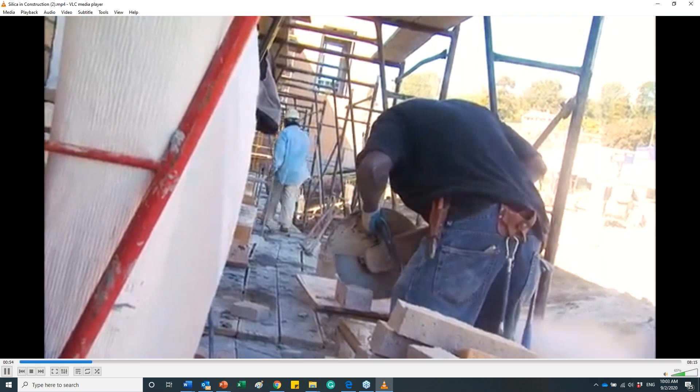The history of lung disease among workers caused by exposure to silica is long and storied. About 2 million construction workers in the U.S. have had occupational exposure to crystalline silica dust. 59,000 of them will develop silicosis and other lung diseases during their lifetime. We've known for decades about how to prevent silica-related diseases. It's not until now that the solutions are mandated by law.

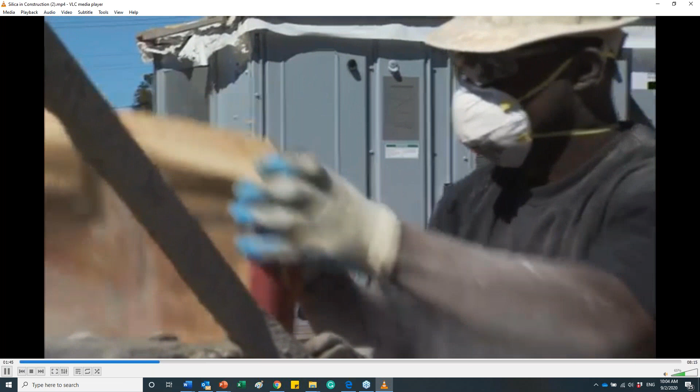Silica is one of the most common minerals on the planet. It's in the sand on our beaches and the quartz of our mountains and land masses. Silica is not dangerous to humans in and of itself. The problems start when we work to manipulate it for our own ends. And that's exactly what happens in construction. When materials that contain silica are disturbed, they generate small particles that can get into your lungs. And once they go in, they don't come out.

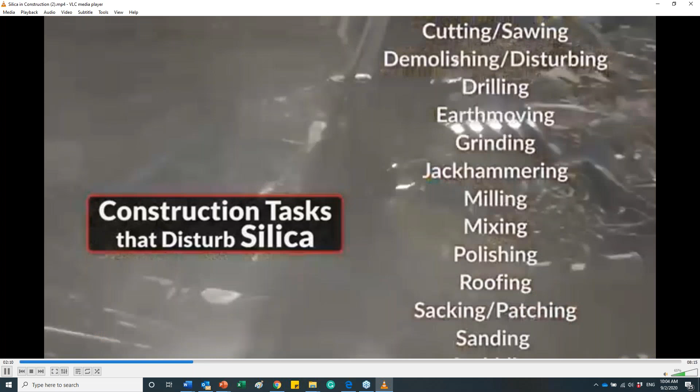On a construction site, we find silica in many materials. Here are some of the tasks that disturb silica and make it dangerous for workers. Bricklayers, cement masons, and roofers routinely work with silica materials. Operating engineers and laborers may work with silica materials when moving earth or doing demolition. If you do occasional cutting or drilling as an electrician, sheet metal worker, plumber, or pipe fitter, you may be impacted. And if your work puts you in a dusty area, you need to be aware of your surroundings.

Silica is not a recently created hazard. It was first discovered by Hippocrates in about 400 BC. 4 centuries later, Pliny the Elder described miners who used forms of respiratory protection. In 1700, Dr. Bernardino Ramazzini identified evidence of silicosis in stonecutters.

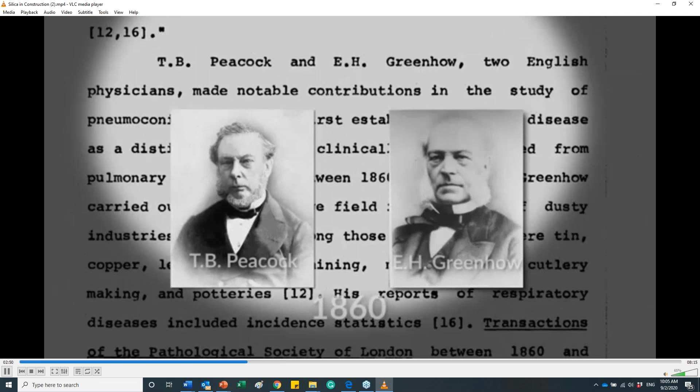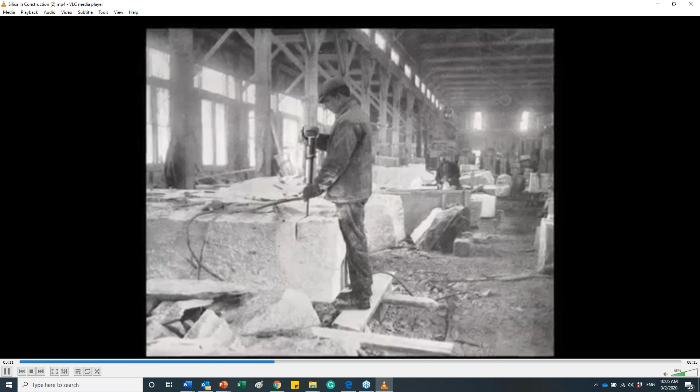In 1860, two English physicians, Peacock and Greenhow, conducted an autopsy of a mason and found a hard, gritty material in his lungs, which they called sand. In the US, in 1917, Dr. Alice Hamilton made the connection between the dust that Vermont granite cutters were inhaling and the resulting fatal illnesses. By the 1930s, those workers had successfully bargained for the installation of ventilation equipment in their worksheds.

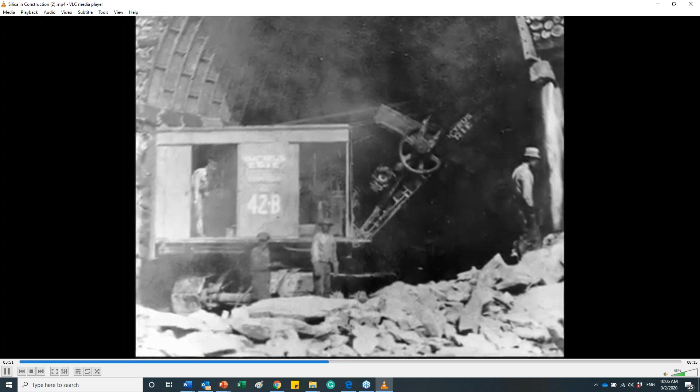In 1931, the nation's worst industrial disaster took place during the building of a hydroelectric project in West Virginia. 1,500 mostly African-American workers who came north to find work ended up dying in the Hawk's Nest tunnel disaster. They were ordered to drill through that mountain, made entirely of silica, and had no meaningful protection at all. It turned out the employer knew how dangerous it was, because when the engineers and company representatives went there, they wore masks. So they knew it, but they didn't care about their workers.

476 workers died almost immediately. Many were buried in trenches in a nearby field with just corn stalks for markers. Another 1,500 contracted the disease within two years.

I lost 3 sons from working in the tunnel of silicosis. One is 18, 23, and 21. And I have silicosis myself, and it's impossible for me to get a job anywhere. My husband, Cecil Jones, died of working in the Hawk's Nest tunnel, contracted silicosis. And each and every day that I worked in that tunnel, I had to carry out 10 to 14 men overcome by the dust.

The Hawk's Nest tragedy directly connected exposure to silica with silicosis and spurred public outcry for worker protection and workers' compensation. In 1938, then Secretary of Labor Frances Perkins commissioned a study on how to work more safely with silica. After a year of work, the National Silicosis Conference Committee made its report of findings and recommendations, showing how silicosis occurs, where it occurs, and what the disease is, with recommendations for its practical control. Above all, the report emphasizes that if these control measures are conscientiously adopted and applied, silicosis can be prevented.

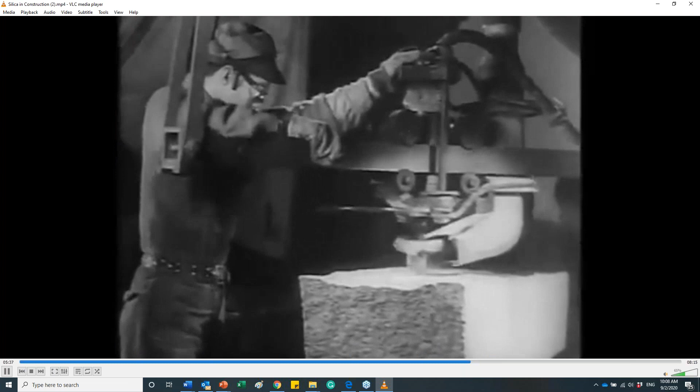The 1938 recommendations were to work wet and use vacuums to minimize the dust. Unfortunately, these were merely suggestions and didn't have the teeth of enforcement. Many employers did follow the recommendations until technology advanced, making it possible to work dry. The new methods saved time and money, but caused a renewed increase in silicosis and other lung diseases.

In the early days of my career, I never saw a masonry saw that was not water cooled. We couldn't - the blades would fall apart if they weren't wet. Since the wet-dry blade came into effect, hey, the water stops going, we keep right on cutting.

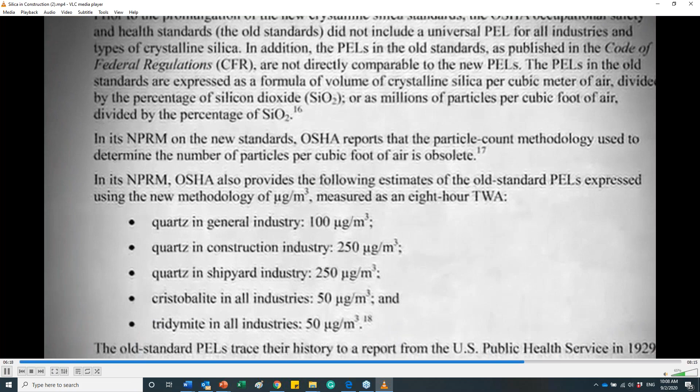The Occupational Safety and Health Administration wasn't established until 1971. That year, OSHA mandated a limit for the amount of silica a worker could be exposed to, but it didn't go far enough. We already knew that the standard that went into place back in the early 70s was out of date the day it went into place.

Fast forward to 2016. After decades of trying, OSHA finally released a federal standard lowering the exposure limit by more than half and creating a series of recommendations for how to work safely with silica. The Labor Department is announcing a final silica rule that updates the standards, saving more than 600 lives per year and protecting the health of thousands of others.

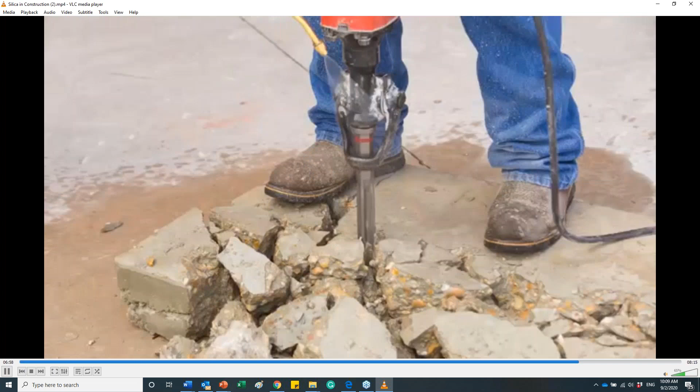The recommendations are essentially the same ones they made in 1938: work wet and use vacuums to eliminate or reduce dust at its source. It took nearly 80 years to get federal protection from silica, but now that it's in place, we need to use it. Workers need to learn more about the hazard and use the recommended controls. Always be aware of your surroundings and the work being done by other crafts, and take care not to bring the dust home on your clothes or person. Contractors must designate a competent person to control and monitor for silica on the job. Make sure your workers are using vacuums, water, substitutes, ventilation, or different work practices, and provide respiratory protection when needed.

Too many workers have died from silica for too many years. We can work safely with silica. Let's do it.

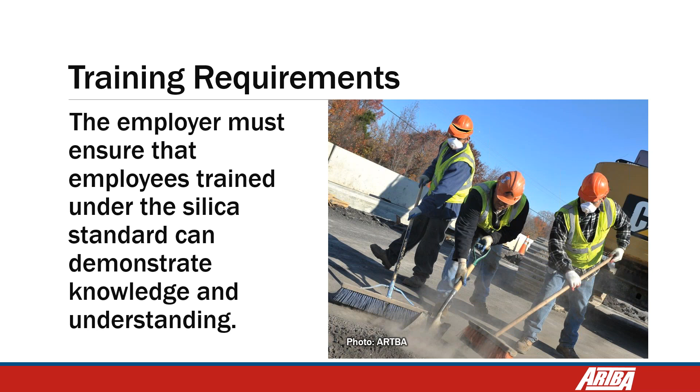Training requirements: the employer must ensure that employees trained under the silica standard can demonstrate knowledge and understanding. And how are they going to demonstrate that knowledge and understanding is another question. How can we do it?

Employees must be trained on the health hazards associated with respirable crystalline silica exposure. Overexposure can place the employee at risk for cancer and all the other illnesses that we were talking about. But we need to show that they were trained.

There is no requirement for where to provide the training or who should provide the training, but some training requirements state employees must be trained on the specific workplace tasks that could expose them to respirable crystalline silica. Look, 18 examples are listed on Table 1, such as milling, asphalt, and drilling concrete.

For these activities, if you go to the OSHA webpage, you are going to find the fact sheets. Let me show you the fact sheets. I have all the fact sheets here. I downloaded all the fact sheets, and each fact sheet covers one of these activities.

Let's open one randomly. Opening this. This is how it looks, one of these fact sheets.

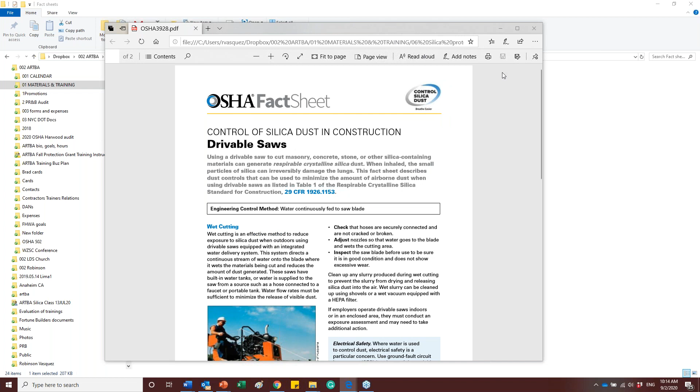So you can find fact sheets for almost every activity you do in your work zone, and you can use these fact sheets to train your workers, because OSHA was not specific about what materials you need to use. But it's interesting that they publish all these fact sheets, and you can use them to train your workers.

So, once a day, in a toolbox talk before doing some activities, you can start printing these fact sheets and start the discussion with your workers. But it's important to at least have the materials that you're using.

For example, you can print all these fact sheets - these are my materials - and you can have a list of the workers receiving the training. Ask them to sign a list regularly every time you train them, because what OSHA requires is to provide training, but it is not requiring who is going to provide the training, where the training is going to be provided, and all these things.

Some training requirements: employers must train employees on workplace specific engineering controls. In these fact sheets you have the engineering controls, work practice controls or administrative controls - you have all the controls there. Also respiratory protection, you have it there too in these fact sheets.

How do they need to use it, or implement all the control methods? How are you going to clean, do the maintenance? What methods are you going to use to remove the dust, to prevent the dust from becoming airborne after you finish the work and have to clean? So all these things are included in each fact sheet has this information.

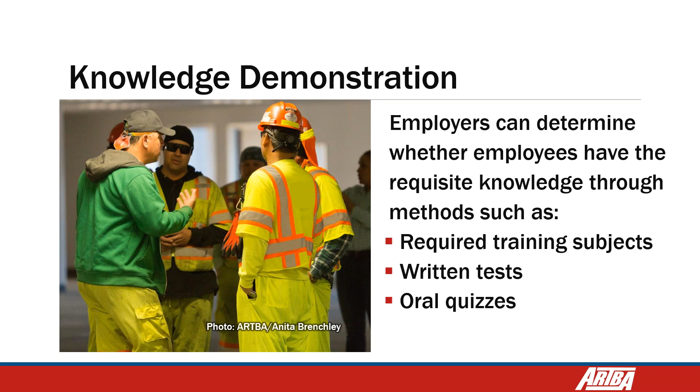Knowledge demonstration: employers can determine whether employees have the requisite knowledge through methods such as required training subjects, written tests, oral quizzes. If you do this, it could be good to keep a record of the workers' answers, because if there is an inspection, it's possible they are going to say, show me that you provided training to your workers, and it could be a good way to show that the workers demonstrate knowledge.

Also, OSHA is not specific about how to do it. When is training required? Employees must be trained at the time they are assigned to a position involving exposure to respirable crystalline silica. So it's important to do it before you start working, basically, to be most effective.

Health hazards, we talked about all the health hazards yesterday. So it's important for your workers to know about it, because they need to be aware of the risk and protect themselves. And also you can train them how to do all these things, basically how to get information, how important it is for them to be safe.

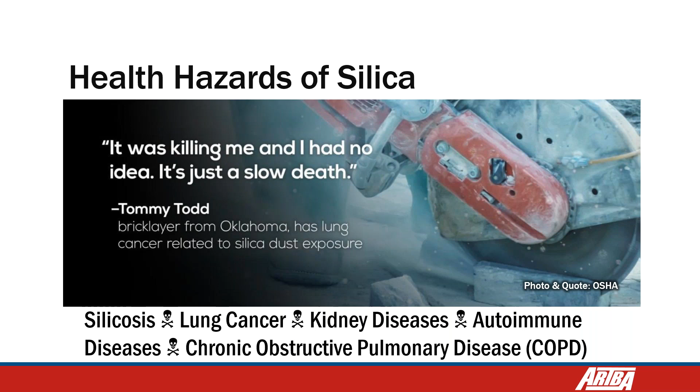They have the power of information in their pockets now. Basically, when I am doing my face-to-face training, I ask the students, hey, let's Google a couple of things: silica protection, OSHA silica standard, OSHA silica table 1, and they can browse it on their cell phones, and they are going to get all this information, and also the fact sheets.

I have another video here. Let me share it with you.

This video provides a brief overview and general information on respiratory hazards in construction and respiratory protection program requirements. The Federal Occupational Safety and Health Administration, also called OSHA, and state OSHA agencies require employers to have respiratory protection programs if their workers are required to wear respirators on the job. This video does not cover all of the things that your employer must do under federal OSHA or state OSHA respiratory protection standards. This video can be a part of the OSHA required respiratory protection training, which includes many topics.

Like how to put on and take off a respirator, and how to use, clean, and maintain your respirator. Your employer must also provide you with worksite specific training. While this video discusses some of your employer's responsibilities under OSHA's respiratory protection standard, it is important to remember that the purpose of a respirator is to protect your health and safety.

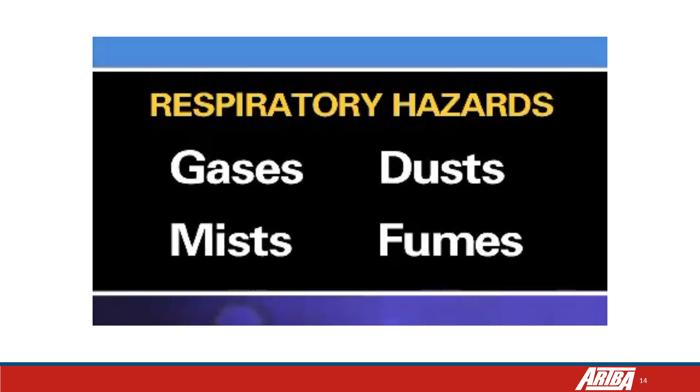Gases, dusts, mists, and fumes may be present at construction work sites. Some of these can make you sick or kill you if you breathe them in. These gases, dusts, mists, and fumes are referred to as respiratory hazards. Some respiratory hazards act quickly, like carbon monoxide, which can make you unconscious or kill you in minutes. Other respiratory hazards can take years to make you sick, like asbestos, which can cause lung cancer decades after you breathe it in.

More examples of respiratory hazards in construction include lead dust and fumes from grinding, welding, cutting, or brazing surfaces coated with lead-based paint. Silica dust from cutting concrete or sandblasting. Solvent vapors from adhesives, paints, strippers, cleaning solvents, and spray coatings. And isocyanate vapors from spray foam insulation and certain spray paints or coatings.

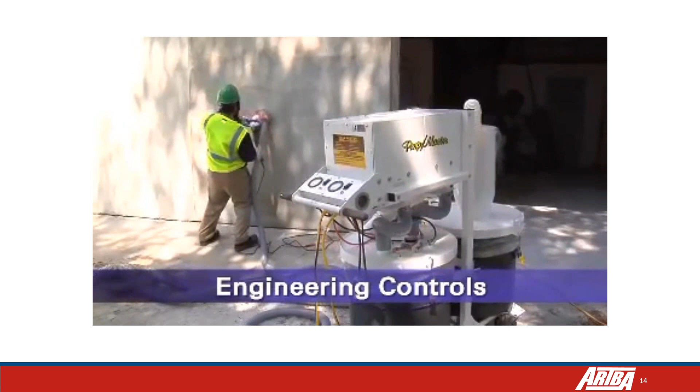When there are respiratory hazards at your job site, your employer must use several methods to reduce your exposure to them, including engineering controls, such as local exhaust ventilation, work practice controls, such as using wet cutting techniques, and administrative controls, such as minimizing the number of workers exposed to the hazard. When you and your coworkers cannot be adequately protected from respiratory hazards through use of these methods, then your employer must provide you with an appropriate respirator to protect your health.

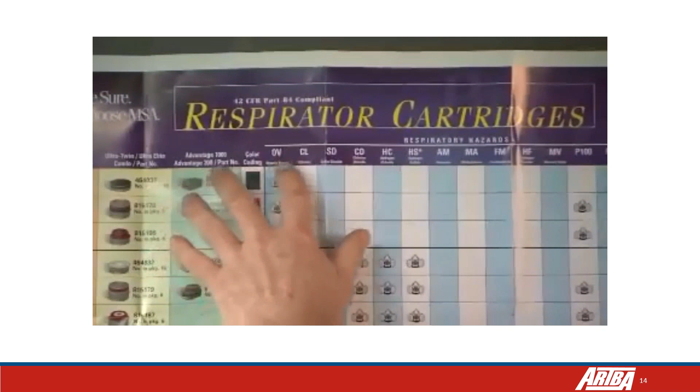Respiratory protection must be selected based on the hazard you will be exposed to on the job. Not every respirator will protect you against every hazard, so it's important for your employer to select the right one.

For example, filtering face piece respirators may protect you against particulate hazards such as dusts. However, a filtering face piece respirator will not protect you against gas and vapor hazards like solvent vapors. If you are exposed to gases and vapors, you will need a different type of respirator.

You could use an air purifying respirator with chemical cartridges, or an atmosphere supplying respirator, such as an airline respirator or self-contained breathing apparatus. Atmosphere supplying respirators are the only respirators that will protect you against hazardous atmospheres, such as carbon monoxide and lack of oxygen. Selecting an appropriate respirator is your employer's responsibility.

When respirators must be used on your job site, your employer must have a respiratory protection program. This program must meet the requirements of either the federal OSHA or your state OSHA respiratory protection standard.

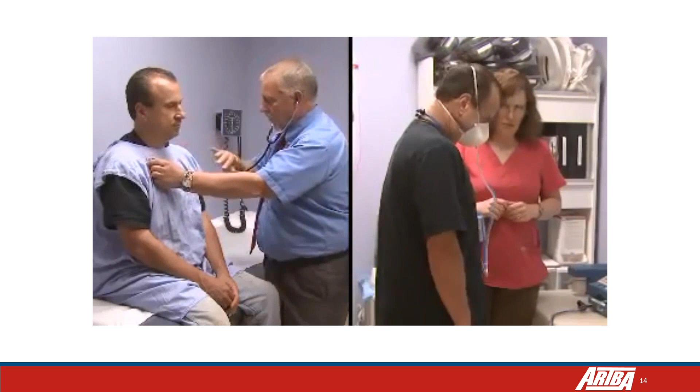The standard requires your employer to do the following: develop and implement a written respiratory protection program, evaluate the respiratory hazards in the workplace, select and provide appropriate respirators, provide worker medical evaluations and respirator fit testing, provide for the maintenance, storage, and cleaning of respirators.

Provide worker training about respiratory hazards and proper respirator use, evaluate workers' use of respirators and correct any problems, and provide you with access to specific records and documents, such as a written copy of your employer's respiratory protection program. Some of these requirements, such as training and fit testing, can be provided by an outside party, including

a union, an apprenticeship program, a contractors association, or a past employer, provided they were conducted within the last 12 months. However, it is still your current employer's responsibility to ensure that all of the requirements of the standard have been met.

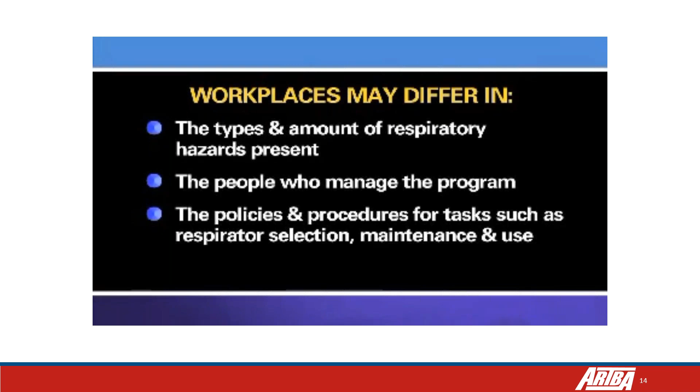Because each workplace is different, it is very important that your employer's respiratory protection program address the conditions found in your specific workplace. For example, workplaces may differ in the following ways: the types and amount of respiratory hazards present, the people who manage the program, the policies and procedures for tasks such as respirator selection, maintenance, and use, and other methods for controlling exposure, such as using wet cutting techniques to reduce airborne dusts.

Since construction work settings change over time, the written program must be updated as necessary to account for those changes in workplace conditions that affect respirator use.

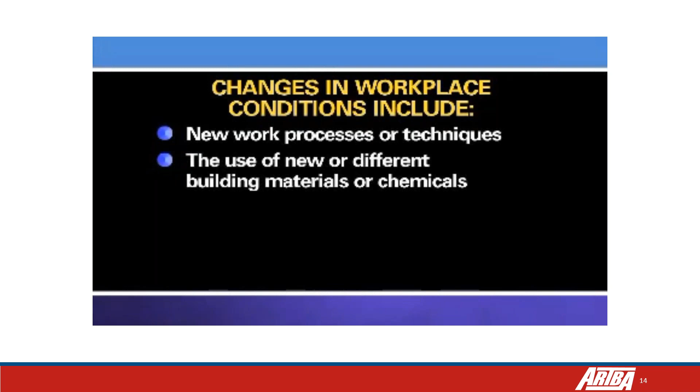For example, changes in workplace conditions could include new work processes or techniques, such as introducing sandblasting into an area, the use of new or different building materials or chemicals, changes in the amount of a respiratory hazard in the workplace, or changes in the types of respirators being used.

Notify your supervisor if something changes in your workplace that conflicts with or may not be covered by your respirator training or established workplace policies or procedures.

Your employer's respiratory protection program must be managed by a qualified, trained program administrator. This person must monitor the program and make sure that you and your coworkers are adequately protected. The program administrator will know a lot about your workplace respiratory protection program and should be able to answer any questions you may have about respirator use.

The program administrator must know about the requirements of the OSHA respiratory protection standard and must periodically evaluate the program and make any necessary changes.

This video has provided you with a brief overview of respiratory hazards in construction and respiratory protection program requirements. There are many other things that you must know and do before you can safely use a respirator in a hazardous work environment. While this video may be a part of your respiratory protection training, your employer must also provide you with additional training on respirators, including worksite-specific training.

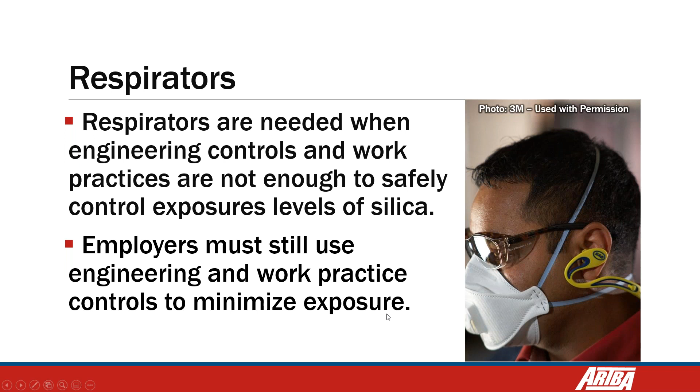Again, it's important to provide training to employees on how to properly use respirators. For example, in this case we can see this guy has a beard, a mustache. Sometimes all this hair is not going to allow the respirator or mask to touch his face completely, and there is going to be some infiltration of contaminated air. So we need to shave the face to use a respirator, for example.

When a respirator is required during table 1 tasks that require respirator use, you can see your table 1. You are going to realize that in some cases, if we are following table 1, we don't need to use any mask or respirator. In other cases, we are required to use masks or respirators after 4 hours of working. In other cases, we need to use a respirator at all times. It depends on the circumstances, on what kind of activity you are doing.

Basically, we need to use it according to table 1 when the exposure exceeds or is expected to exceed the permissible level, which is 50 micrograms per cubic meter in an 8-hour exposure. So, using table 1, whenever you need to use a mask, it means that you are above the permissible exposure level.

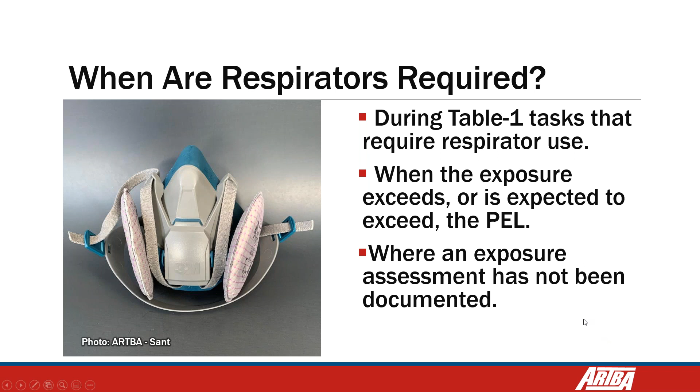If an employee is required to wear a respirator at any time during a work shift, this counts as 1 day toward the 30-day requirement. Look, there is a requirement: when your workers are working with respirators during these 30 days, there is a requirement to send your worker to the doctor to verify that everything is okay with his or her lungs.

This is interesting because anytime, according to table 1, your worker needs to use a respirator, it counts as 1 day. So it's important to think about maybe rotating our workers to prevent them from working more than 4 hours in some cases, so they don't need to use a mask.

A sort of rotation method, just to prevent them from accumulating these 30 days of using a mask. That is going to trigger the need to take your worker to the doctor, just in case.

Then what respirators can be used for silica? All NIOSH-tested and certified particulate or supplied-air respirators may be used for silica protection, only those approved by NIOSH, okay? And when you go to Table 1 again, the law is asking us to use masks or respirators with an APF of 10 in many cases. There is only one case in which an APF of 25 is required.

We understand that N95s are not available in the market because of this situation, but there are some alternatives and you need to explore this document. Let me show you. When you visit your attached documents, you can find this document there. So take a look at this information to help you fulfill the law and protect your workers in these difficult circumstances. We have here some sources of additional information. So let's continue with the next module.

Okay. Now we are going to talk a little more about Table 1 and the alternatives we have to fulfill the law. We have two choices. Either we follow Table 1, with the 18 different tasks in which we can produce respirable crystalline silica dust, and the law says if you follow Table 1 and all the methods to prevent airborne crystalline silica, you are going to fulfill the law. So follow Table 1 and your OSHA inspector is going to be happy. That's one alternative, and we're going to talk more about it.

The other choice: maybe you don't want to follow Table 1 because the activity you are doing is not included in its 18 activities. So you have the alternative exposure control methods: the performance monitoring option and the scheduled monitoring option. The performance monitoring option requires you to create a sort of average of the activities your workers are doing and protect them accordingly. The scheduled monitoring option considers what they are doing according to the process and construction activity over time, and takes evaluations according to this process. Let's explore these alternatives a little more.

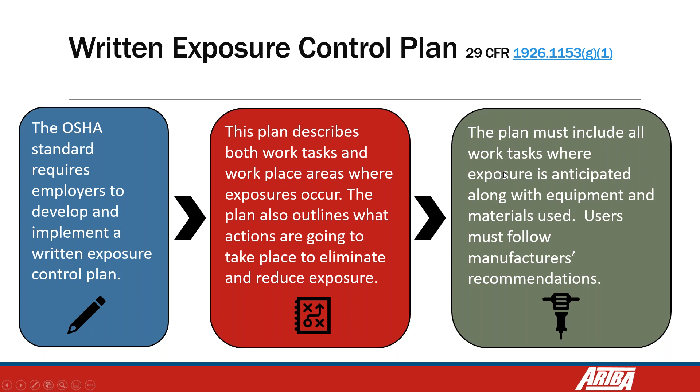For example, there are things that the exposure control plan must include in any circumstances. Maybe you're following Table 1, or maybe you are not, but you have to follow this. Include these topics in your plan. Okay. First, a description of the tasks in the workplace that involve exposure to respirable crystalline silica. You have to describe what task you are going to do.

Then a description of the engineering controls, work practices, and respiratory protection used to limit employees' exposure to respirable crystalline silica for each task. Okay, you have the task. Now you need to describe what engineering methods, what administrative methods you are going to implement to prevent this dust from becoming airborne. What are you going to do to control this? First is what activity you are going to do that produces the dust. Second is what method you are going to use to control the dust.

Third, a description of the housekeeping measures used to limit employee exposure to respirable crystalline silica. Okay, you have to do some maintenance, housekeeping. How are you going to do it? In a way that prevents the dust from becoming airborne. Again, using water or a vacuum or a wet vacuum to get all the slurry, all this silica with water.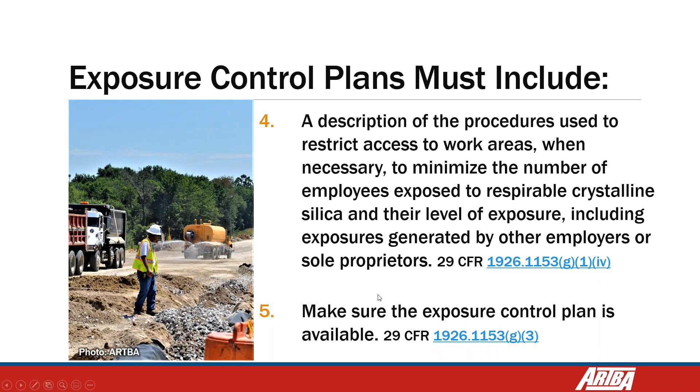So it's important to take note: make sure the exposure control plan is available. It's talking about having copies, or having a photocopier there ready to make copies, but that's the idea.

Additional requirements in the plan. OSHA requires that the employer shall review and evaluate the effectiveness of the written exposure control plan at least annually and update it as necessary. So look, it's not enough to have the plan. They are going to require you to update the plan at least annually, okay?

So it's one of the questions. You go to the directive of OSHA about the silica inspection, it's some of the questions that the inspector is going to ask. Are you revamping your plan? When was the last time you revamped your plan?

So then we have this: the employer shall designate a competent person to make frequent and regular inspections of job sites, materials, and equipment to implement the written exposure control plan. So there is a big discussion about who is a competent person, okay? A competent person is an individual who is capable of identifying existing and foreseeable respirable crystalline silica hazards, authorized to take prompt corrective measures to eliminate or minimize them, and has the knowledge and ability to implement the written exposure control plan, okay?

Look, there are many competent person trainings now for fall protection, confined space, different competent persons in different areas. But we have to emphasize something. It's not enough for somebody to go to a class and know a lot about the topic to be a competent person. The company needs to give that person authority. Okay, without the authority given by the company to that person to take prompt corrective measures to eliminate or minimize the hazards, you don't have a competent person. You have somebody who knows a lot about the topic, but he is not a competent person.

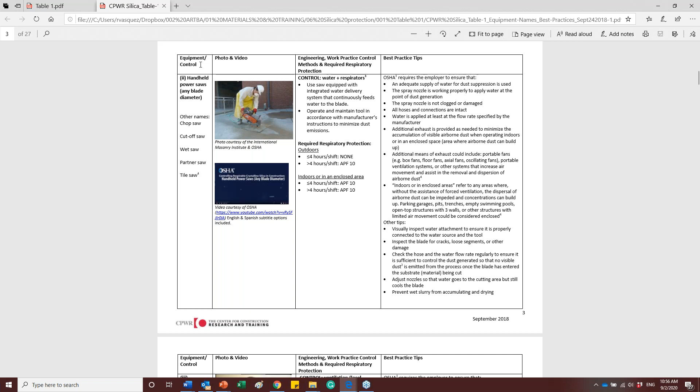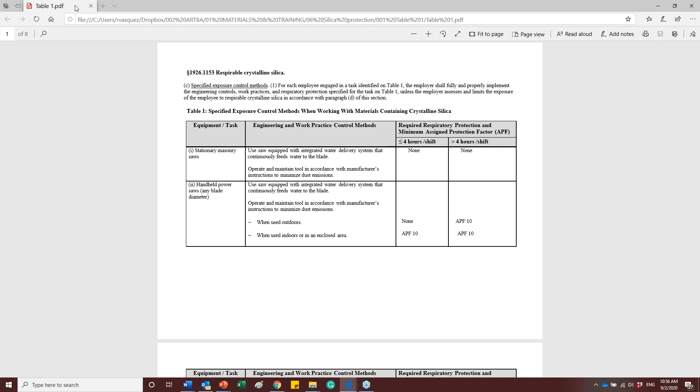So instead of having just 3 columns, it has 1, 2, 3, 4 columns. So with all this information, basically you can create a plan, and we are going to learn how to create a plan. But you can browse CPWR Silica table 1, and you are going to find it. It's not so difficult. But table 1 is very, very useful and interesting. At the beginning I was thinking, oh wow, it's going to be difficult to understand all these things. But after this training and with practice, I'm sure you are going to be comfortable working with table 1.

Again, specified exposure control methods, table 1 of the OSHA rule. Employers who follow table 1 correctly are not required to measure workers' exposure to silica and are not subject to the permissible exposure limit. So it's interesting, because if you follow table 1, you are not required to take samples of the atmosphere and send them to the lab. That's something important.

If you are not following table 1, you are going to need samples of the air and send them to the lab to evaluate the level of contamination with silica. But if you are just following table 1, OSHA says you don't need to send anything to the lab. So just have a plan and follow table 1, and that's going to be okay. It's interesting how OSHA is making it easier for everybody to follow, or prefer to use, table 1.

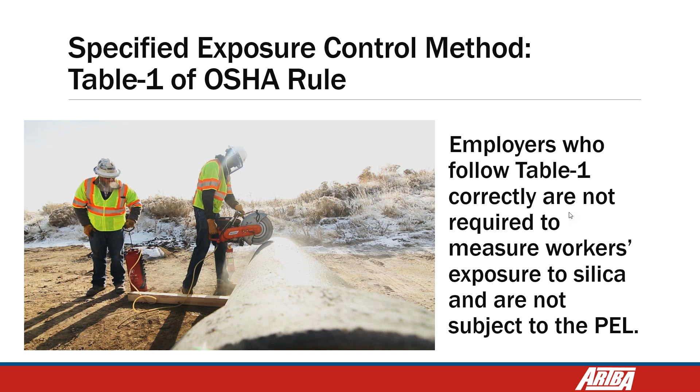Mandatory actions for alternative exposure control methods: if you don't follow table 1, you need to work with these limits, and it's also applied to table 1, but we're going to talk a little more about it later. Basically, this is some good concepts that we need to know.

Action level: if you are below the action level, which is 25 micrograms per cubic meter of air during 8 hours time weighted average, you don't need to provide any method to protect your workers. You're working okay, because the level is not enough to affect your workers. You don't need to use any administrative control or engineering control, or provide masks to your workers, because your activity is not producing enough silica.

But if your activity produces 25 micrograms or more, and you are below the permissible exposure limit of 50 micrograms, now you are going to follow table 1 and find solutions using all the engineering methods and administrative methods that we have there. And maybe you don't need your worker to use any respirator.

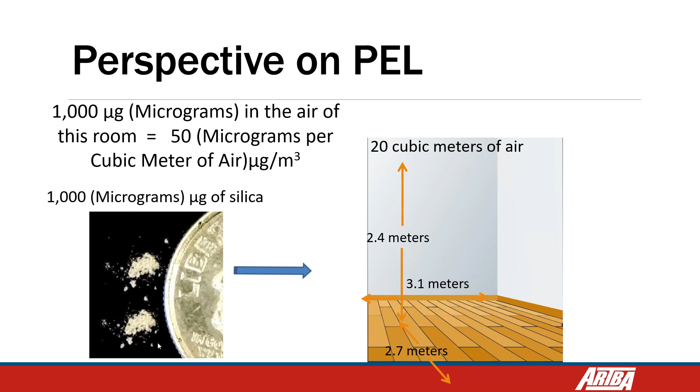If we don't protect the worker, you could say, no, it's not enough, it's so little. But if you consider that your workers are going to work in this environment day after day, all this dust could accumulate in their lungs and never leave.

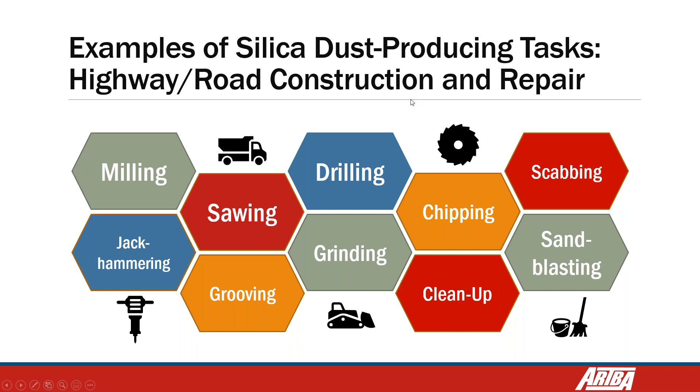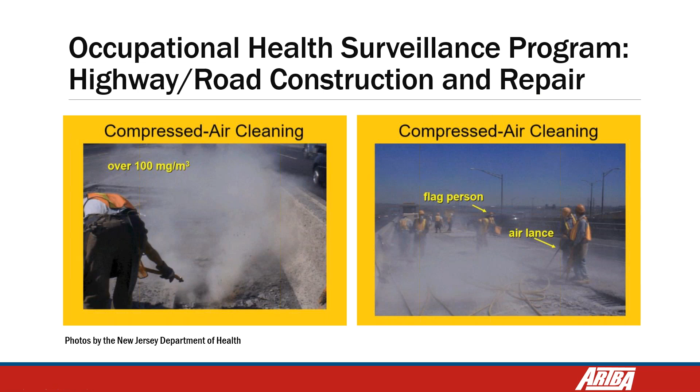Also the water control method—there is another page in Table 1 that is going to show us the vacuum control method, and all about when you need to use a mask. If you are working outdoors, you don't need to use a mask if you are working less than 4 hours. But if you are working more than 4 hours outdoors, you need to use a mask. But if you are working indoors, you need to have a mask all the time. So you have this information also here.

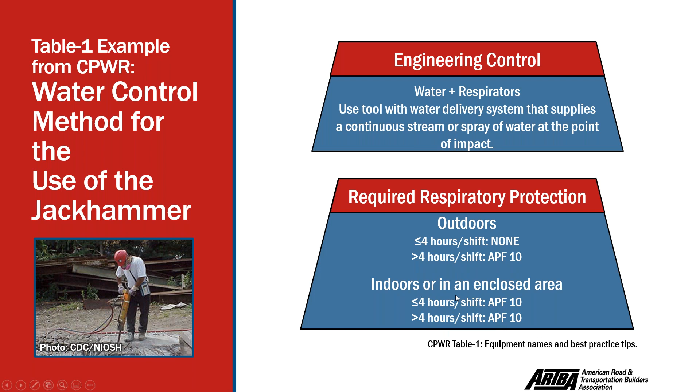Let's see, for example, when we use the water control method—using Table 1, we can have this summary. It's required, for example, using the engineering control, but we are going to use water, and also we need to use respirators. Use a tool with a water delivery system that supplies a continuous stream or spray of water at the point of impact. This requires respiratory protection. As we said before, if you are working outdoors below 4 hours, you don't need any, but if you're working more than 4 hours, you need a respirator. But if you're working indoors, you need a respirator at any time. Okay, so this is the condition—engineering controls.

In this case, well, we are using water here. In this case, we are using a ventilator, a vacuum also.

Similarly, use tool with commercially available shroud and dust collection system, operate and maintain tool in accordance with manufacturer instruction to minimize dust. Dust collector must provide the airflow recommended by the tool manufacturer or greater and have a filter with 99% or greater efficiency and a filter cleaning system. All these things you need to put inside of your plan.

Require respirators? Yes, same as the water control, indoors, outdoors, it depends.

Now we are going to watch a video. This video was created by OSHA just for this activity. It's a sort of sample, okay, just for this activity. And they are going to talk about both methods, the water method and the vacuum method. But it's the same activity. We are working with a jackhammer.

The Occupational Safety and Health Administration requires employers to limit workers' exposure to respirable crystalline silica on the job. This is one of a series of videos showing dust control methods that OSHA specifies for many common construction tasks in Table 1 of the Respirable Crystalline Silica Standard for Construction.

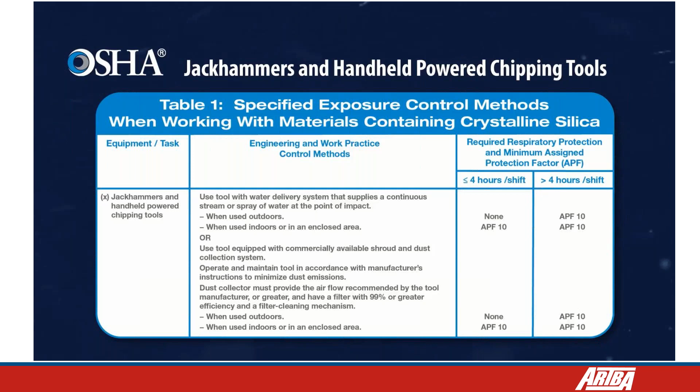When used properly, these methods are effective in limiting workers' exposure to respirable crystalline silica dust. This video describes two methods that can be used to control dust when using a jackhammer or handheld power chipping tool on materials that contain crystalline silica: a water delivery system, or a commercially available shroud and dust collection system. First, let's review the full and proper use of a water delivery system.

To control dust created by a jackhammer or handheld powered chipping tool, workers can use the jackhammer or chipping tool with a water delivery system. To comply with Table 1, the water delivery system must supply a continuous stream or spray of water to the point of impact. For example, a helper can spray a continuous stream of water at the point of impact from a portable pressurized canister or from a hose connected to a water faucet or water tank.

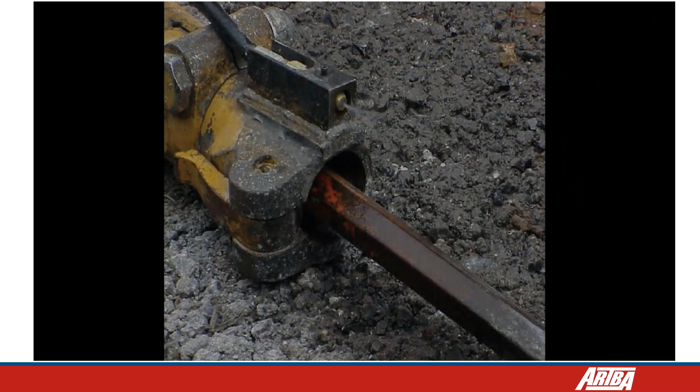Alternatively, the water delivery system can be mounted permanently on the tool. Instructions for retrofitting jackhammers with water delivery systems are available at www.osha.gov/silica. Whether water is sprayed by a helper or by a water delivery system mounted on the tool, make sure the amount of water is sufficient to minimize release of visible dust.

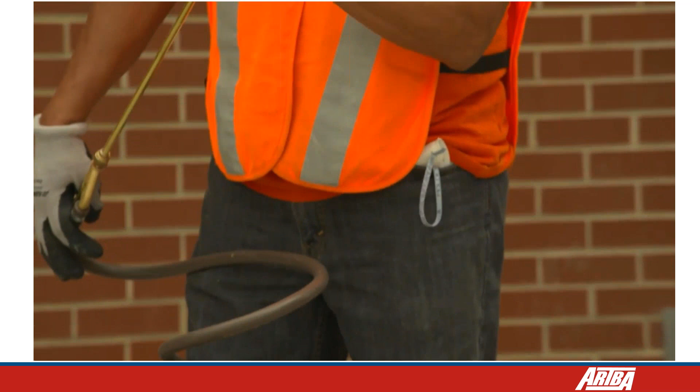It's also important to correctly maintain the water delivery system. When the water delivery system is not working properly, dust is not effectively controlled. With regular use, hand pumps can wear out, hoses can become pinched, hose connections may fail, and nozzles can become clogged. To make sure a continuous stream of water is applied at the point of impact, operators should regularly check that the water supply is sufficient. Check nozzles for damage, remove clogs, and be sure hoses and connections are intact and functioning correctly.

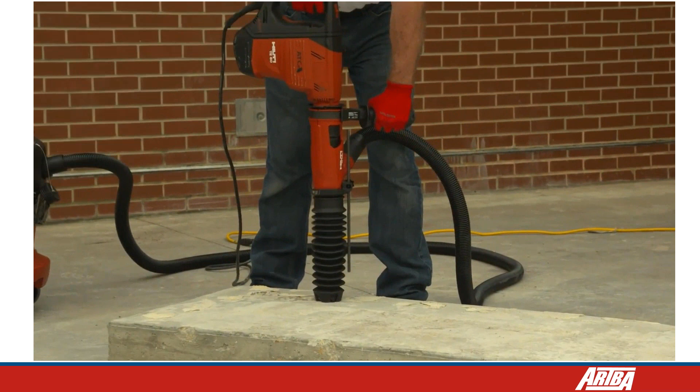Now, let's review the full and proper use of a commercially available shroud and dust collection system. A shroud and dust collection system can control dust created by a jackhammer or handheld powered chipping tool. To comply with Table 1, the dust collector must provide the airflow recommended by the tool manufacturer and have a filter with 99% or greater efficiency and a filter cleaning mechanism.

It's also important to correctly maintain the dust collection system. When the dust collection system is not working properly, dust is not effectively controlled. With regular use, the shroud or cowling can become excessively worn, vacuum hoses can become clogged, filters can become overloaded, and dust collection bags will fill up.

To help ensure the system is working correctly to minimize dust emissions, the shroud must be intact and installed according to the manufacturer's instructions. The jackhammer or chipping tool must also be operated and maintained in accordance with the manufacturer's instructions to minimize dust emissions.

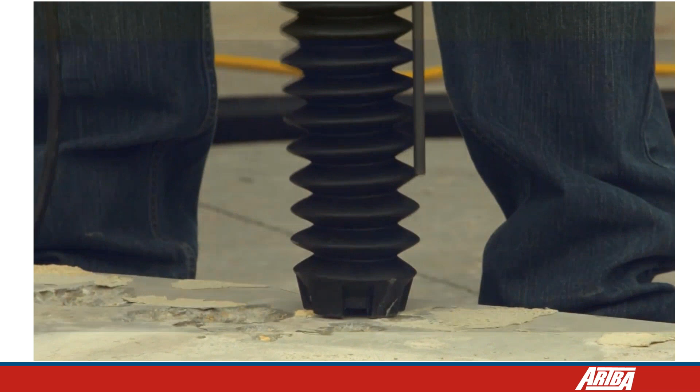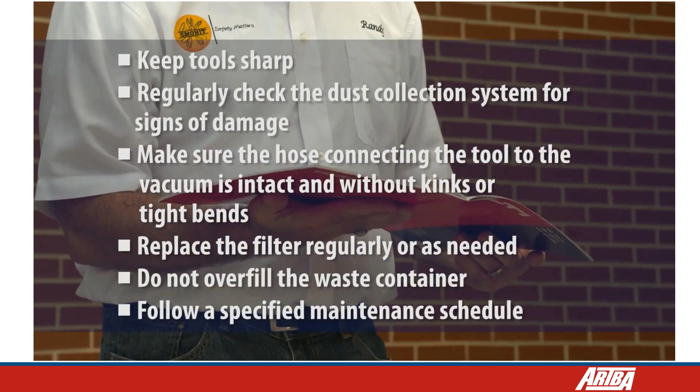Instructions often direct users to keep tools sharp, regularly check the dust collection system for signs of damage, make sure the hose connecting the tool to the vacuum is intact and without kinks or tight bends that can reduce airflow and dust collection. Replace the filter regularly or as needed. Do not overfill the waste container and follow a specified maintenance schedule. Be sure used filters and dust collection bags are handled in a manner that will minimize workers' exposure to silica dust.

As long as either of the specified dust control methods is followed when using a jackhammer or handheld powered chipping tool, and the task is performed outdoors for 4 hours or less during a shift, the tool operator and workers who are assisting the operator are not required to wear respirators. If the task is performed outdoors for more than 4 hours during a shift, or indoors, or in an enclosed area for any length of time, the tool operator and workers assisting the operator must use respirators with an assigned protection factor of at least 10.

When respirators are required, they must be put on before beginning the task and must be worn the entire time the task is performed. When respirators are used, the employer must comply with OSHA's respiratory protection standard.

Using a jackhammer or handheld powered chipping tool indoors or in an enclosed area requires an exhaust method, such as a portable fan, as needed to minimize the accumulation of visible airborne dust. Be sure that any exhaust method chosen moves airborne dust away from workers and does not block an exit route.

Employers who fully and properly implement the appropriate dust control methods specified by OSHA in Table 1 are not required to measure the tool operator's exposure to respirable crystalline silica or the exposure of other workers assisting with the task.

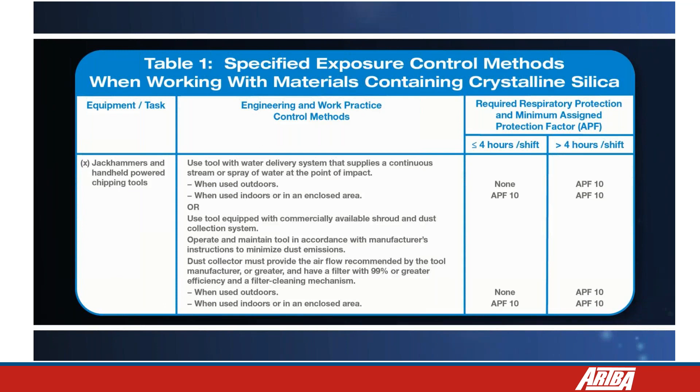The respirable crystalline silica standard for construction also includes additional requirements to protect workers exposed to respirable crystalline silica. Many of these requirements apply whether employers are using a dust control method specified by OSHA in Table 1 or an alternative dust control method.

More information on the standard's requirements to protect workers exposed to respirable crystalline silica, including information on specified exposure control methods for other common construction tasks, can be found at www.osha.gov/silica. For information about other OSHA health and safety standards, visit www.osha.gov. I recommend you visit this webpage.

We don't have time to cover all the 18 different activities, but if you go to the OSHA.gov silica webpage, you are going to find fact sheets for each of these 18 activities and some videos like this one related to one activity. Maybe there are 5 different activities, the most important activities, and you have videos for each of them. But the idea is to use Table 1 to create a plan.

We are going to learn in a few minutes how to create a plan using some examples, but this is the idea. Or call OSHA at 1-800-321-OSHA. Use this information to get the idea of how you can get more information, because it's available, so it's not so difficult to get it.

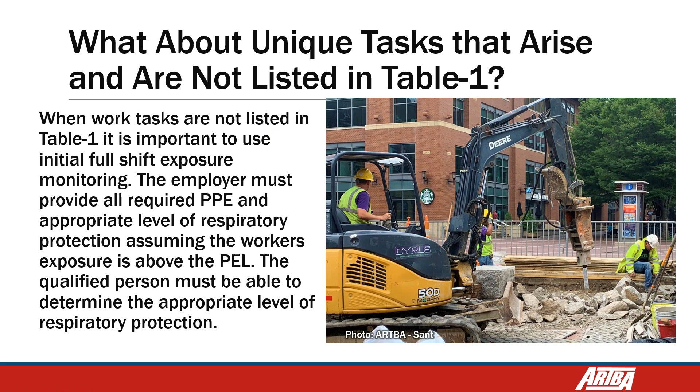It is essential that a qualified person conducts initial monitoring. According to the law, in this case, a qualified person conducts initial monitoring, not a competent person, but a qualified person, as soon as work begins, so it's important.

If you are going to begin or start an activity not included in Table 1, you cannot follow Table 1 for any reason. You have to start doing initial monitoring. It means basically taking a sample and sending it to the lab and getting the information about what is the level of exposure.

If it is below 25 micrograms, you don't need to do anything. If it is between 25 and 50 micrograms, you need to follow some administrative and engineering methods to control the dust. And if it is more than 50 micrograms, in addition to those administrative or engineering methods, you need to use or provide masks to your workers.

OSHA intends for employers using the scheduled monitoring option to conduct the initial monitoring as soon as work begins, so they are aware of the exposure levels and where control measures are needed. Workers need to know the result of the exposure assessment. It's important to provide this information to the workers too.

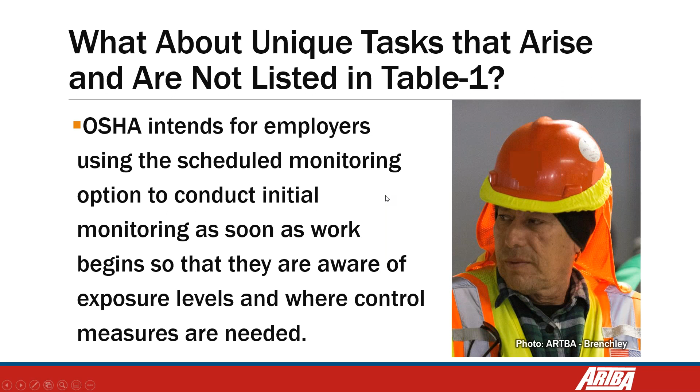So this was the break, but we are not going to do it. We are going to talk a little about alternative exposure control methods, although we don't have a lot of time. But just in case, you have this information in your handouts.

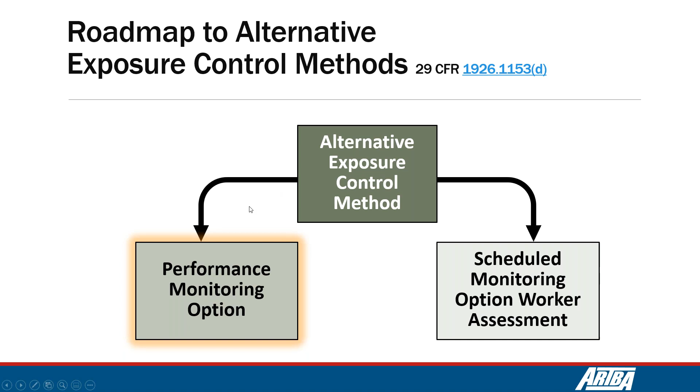Not everybody follows the alternative control methods now, but you can go to the law and follow these indications. These graphics repeat what I told you about the exposure limit: above 50 micrograms, between 25 and 50 micrograms, or below 25 micrograms, is what I was telling you before. So you have to follow this instruction. Not everybody is going to use it, but you have this information there just in case you need to create your own plan, different from Table 1.

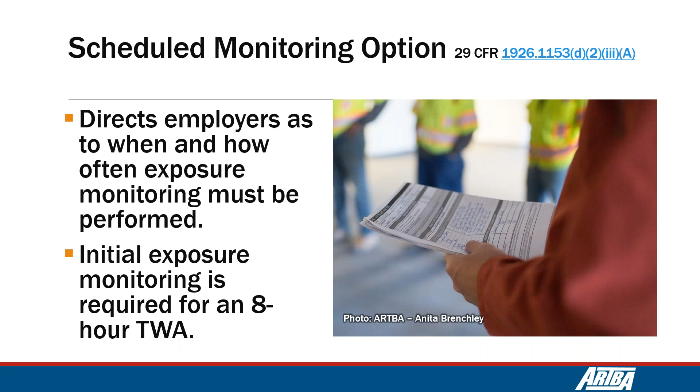It's a little complex, these topics, but we don't have enough time. We are going to create a plan now. How are we going to create a silica protection plan following Table 1?

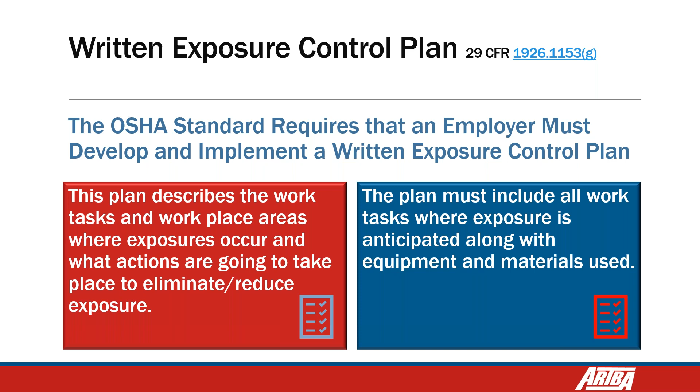So again, we are following table one. We need to create an exposure control plan. The law doesn't require, in this case, to have a competent person or a qualified person. It can be written by anybody. It's interesting. It's not a requirement.

And we need to provide all these things, the description of the task in the workplace that involve exposure to respirable crystalline silica. So let's do this. You have the activity number 1, 2, and 3, I think. Okay, you can use now activity number 1. Let me put activity number 1 here. And this is the activity, okay? You have this situation.

Using the template provided on OSHA's table 1, you need to use the table 1 now. And they are just giving us a tip, task number 8. You can go to the table 1, task number 8, because that's the situation we are going to use. So create a silica exposure plan for the following activity. This is the activity: drilling holes for dowel bars in the edge of concrete paving using a gang drill.

So this one, you go to task 8, number 8, and you are going to find this activity. So workers will be assigned to drill vertical dowel bar holes in the edge of previously poured concrete paving. Each employee assigned to the drilling task will be rotated every 3 hours. So now you go to table 1, activity number 8.

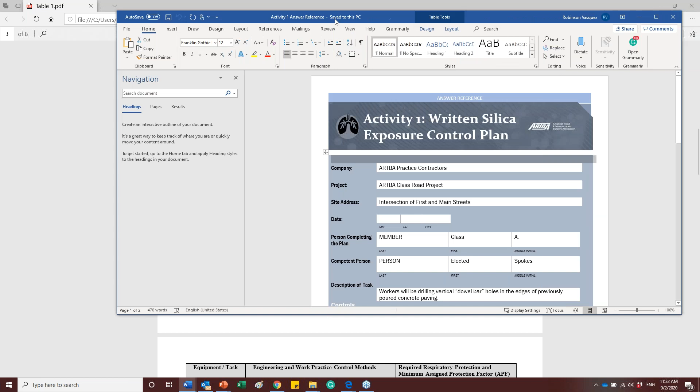So how am I going to use this in my plan? Let me go to my plan. Where is my plan here? Let me move my plan here. This activity is solved now, okay? But after this training, I'm going to send to Paula the answer for these activities, so you can have a plan for each of these activities and you can follow the idea that we are going to share with you.

In a plan, you need to put what is the name of the company, the name of the project, site address, date. You need to put the date when you are creating the plan, person completing the plan, who is a competent person. You put the name of the competent person, description of tasks. Again, you use the activity: workers drilling vertical dowel bar holes in the edge of previously poured concrete paving. So it's the same activity.

Control descriptions. Basically, you can use what equipment you are going to use, and basically you can summarize it. The exposure control plan has been developed in accordance with the guidelines in 1926.1153 table 1 task 8, just to summarize it. And you can describe the work practices. To do these work practices, you can use, for example, the CPWR table 1, in which they describe some tips about work practices that you have to follow to comply with the law.

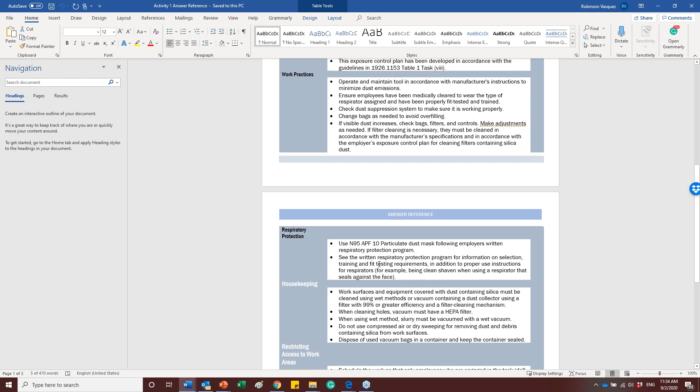Or you can go and use the OSHA fact sheets, find activity number 8, and copy and paste these work practices here in your plan. That's what we did. We copy and paste the fact sheet and put the information here for work practice. Then respiratory protection, yes, it's mandatory for us as we saw in the table 1. It's mandatory to use respiratory protection APF of 10, which means N95 or an elastomeric mask. So we can copy and paste again all this information from the fact sheets.

And housekeeping, restriction of access to work areas, notes, and actions, basically it's the same in all these 18 different situations. It depends, of course, if you are using water or spraying water or a vacuum, a dust collecting system, you can use basically the same information and so on. Okay, and that's it. You have here a plan just for this kind of activity.

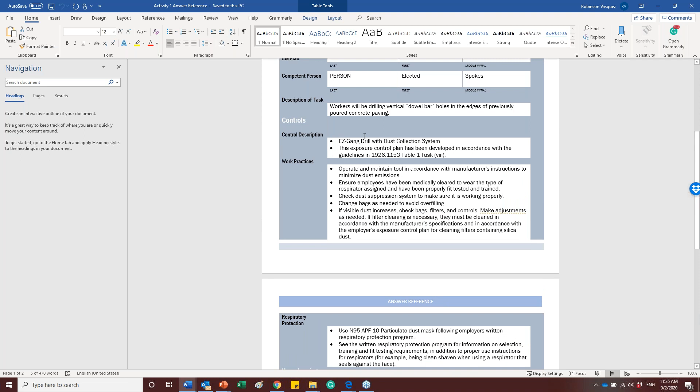Okay, and remember, you are going to need to create a plan for each activity that you are going to require in your work zone. So similar to this, we can use another activity. You have activity number 2.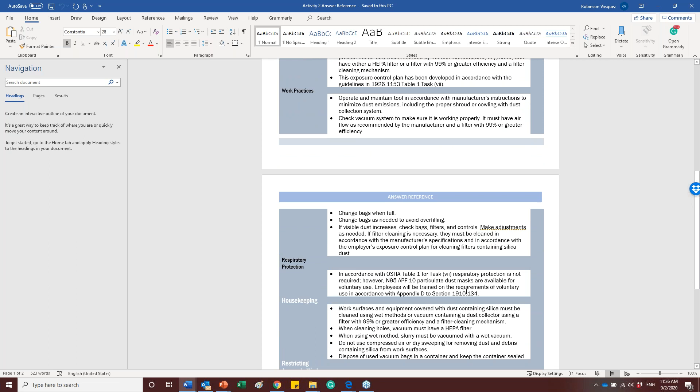Work practices: you can get these work practices by going to the fact sheets, activity number 7, and copy and paste and continue with this idea. Basically, you can easily create your own silica protection plan customized to each activity you are going to do. Okay, this is one way to do it.

You can also go to the CPWR webpage. In that webpage, they are going to help you to create your own silica protection plan according to the information you provide. So you can print it and use it and keep it and share it and implement it.

But as I told you, it's not enough only to have a plan. You have to execute the plan. You have to supervise that everybody is complying with the plan. You have to train your workers. You have to designate a competent person. It's important in this situation because the OSHA inspector can ask about all these topics.

By the way, before we had the COVID-19 crisis, OSHA was planning to dedicate this year to focus their inspections on silica protection. I don't know how they are going with this idea, but that was the initial plan, to focus very much on silica protection.

So what I'm going to do is, for each activity you have there, I'm going to send you a plan. Okay, it's a sort of example. And I recommend you very much to visit the OSHA Silica web page. Review these videos that we were sharing before, and also download all the fact sheets. Per each activity, you are going to find a fact sheet that's going to help you to fill each plan.

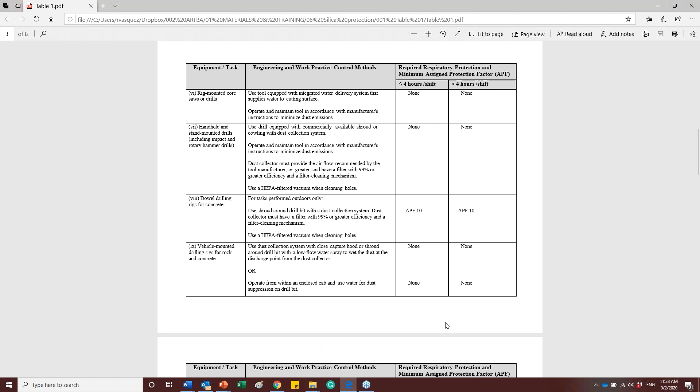Okay. So this is basically what I wanted to share with you about how to create a plan. Let's review very fast. Let's review again how to create a plan. Exposure control plans must include at least the following elements: a description of the tasks in the workplace that involve exposure to respirable crystalline silica.

Then a description of the engineering controls and work practices. You can get these engineering control practices from Table 1. And respiratory protection used to limit employee exposure to respirable crystalline silica for each task. You can get this information also from Table 1.

In some cases, it's mandatory to use the mask all the time. In some cases, it's only required after 4 hours. In some cases, you don't need to use it. And it depends also on whether you are working indoors or outdoors. So you have to be aware about this situation.

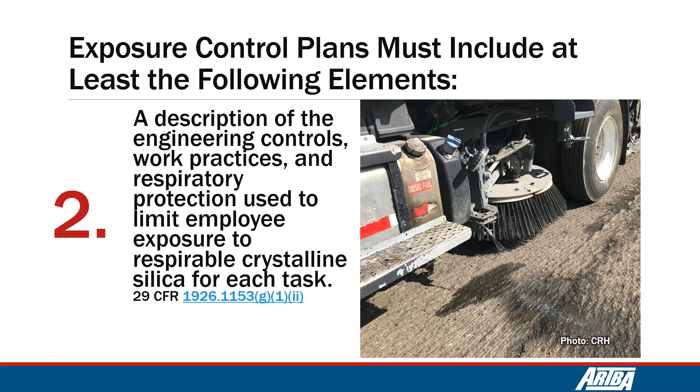Then it's mandatory to have a description of the housekeeping measures used to limit employee exposure to respirable crystalline silica. You can get this information especially from the fact sheets. Not Table 1; they are going to give you the engineering method, but they are not going to give you the housekeeping method. But you can get it from all these fact sheets.

A description of the procedures used to restrict access to work areas to minimize the number of employees exposed. This is an administrative method that is basically provided again in the fact sheets. So you can copy and paste whatever is in your fact sheets according to the tasks you find for your activity.

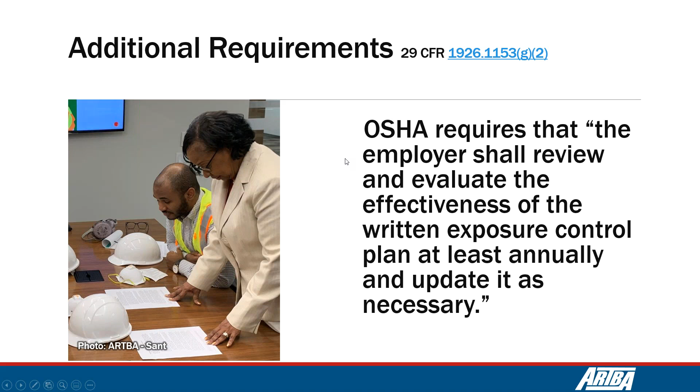Then OSHA requires that the employer shall review and evaluate the effectiveness of the written exposure control plan at least annually and update it as necessary. Okay, it's one question that the inspector is going to ask you: are you reviewing your plan regularly?

Additional requirements: upon request, the employer must provide a copy of the written exposure control plan to covered employees, designated representatives, and OSHA. So you need to have copies of your plan ready to share with your workers, OSHA, and representatives. The employer shall designate a competent person to make frequent and regular inspections.

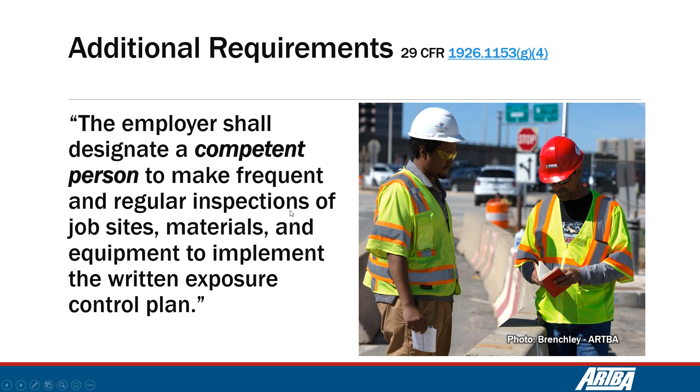We were talking about competent person before. Yeah, we talked about the competent person before. Where can we find exposure control plan resources? Again, visit CPWR. As I told you, they have this information available for everybody.

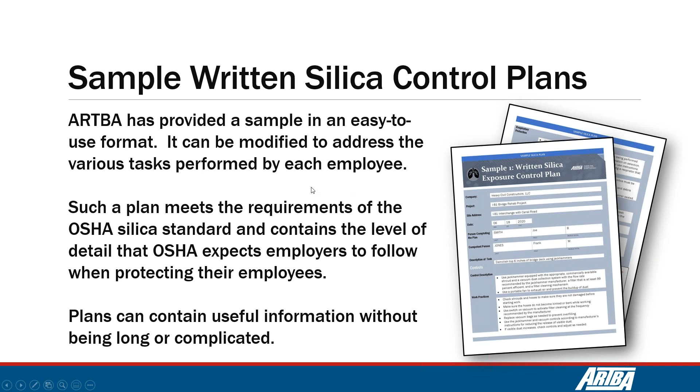And you can use the sample written silica control plans that I'm going to send to you after we finish this presentation, so you can get an idea how to create a plan and use this same format for other plans. So I'm going to send you a template, an empty template too. Okay, we did activity number 1 as a sample, and that's it. So this is the end of the section about silica protection.

I want to go very fast to our COVID-19 protection. Okay. You know what is COVID. We have been familiarized with this emergency, this pandemic now. It happened in China, but it's around the world now. What makes it different from other respiratory infections is that this virus is very tricky, you know.

You can be infected and you don't know, and you can start infecting other people and you don't know that you are sick. Other kinds of SARS or COVIDs before, you began to transmit this illness when you had the symptoms. But in this case, you can transmit the virus even if you don't have symptoms. You can be infected without symptoms, and you can go around and people can be infected because of you, but you don't have symptoms. It's tricky. That's the big problem with this illness.

It figured out a way to camouflage and go around creating trouble everywhere without being detected. That's why it's important to do the test on time. For example, my kids were near a teacher who has COVID-19. Immediately they knew about it. The test of the teacher was available. They told us to be in quarantine because we didn't know.

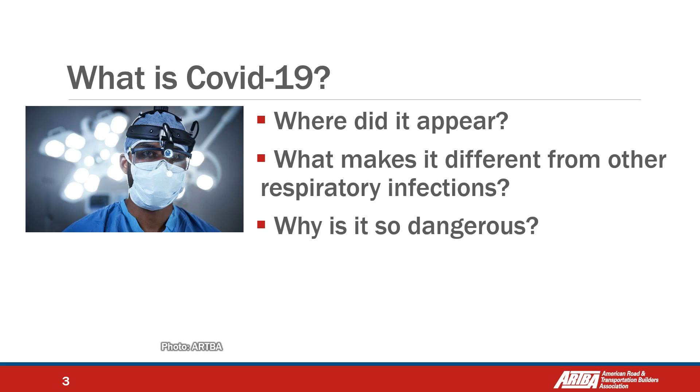Happily, we didn't have any problem with this, but the teacher didn't know. The teacher was suspecting that she has COVID-19. She took the exam, and the next day after she was with my kids, it happens that the test was positive. So we didn't know it. That's one of the reasons why it is so dangerous.

So how does COVID-19 spread? It's from person to person, just talking. These little droplets of saliva can be airborne for a while. So surfaces and objects can also be contaminated with these particles, these respiratory drops, reaching the mouth, nose, or eyes of close people or inhaled into the lungs.

So that's why we don't want to touch our eyes or mouth, because the virus could be in your hands, and when we touch our nose or eyes or mouth, the virus can go inside our bodies. It is unlikely to be contaminated over long distances. The question is, okay, can the drops be on the floors?

That's why it's recommended when you arrive at your home, change your shoes. Don't use the same shoes, or disinfect your shoes, because you could be in an area in which you have the virus on the floor too, because all these drops are going to follow a flow and go on the floor, and your shoes are going to get it, and you don't want to bring it to your home.

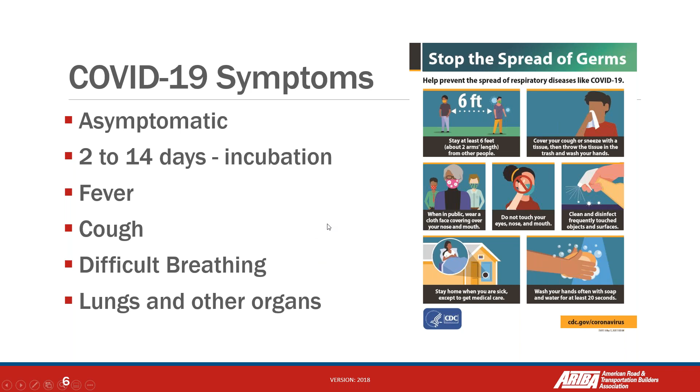but people are saying, hey, even your heart, your brain, your kidneys, your liver can be affected by this because it's creating an inflammation not only in your lungs but in other parts of your body. It depends. It's a case by case situation, you know.

Frequent victims: advanced age people, people with lung problems, heart problems, weak immune systems, exposure to the public and infected people. For example, weak immune system, people with cancer and their cancer treatment, the immune system is not working properly. So who is going to be infected? It depends also how you are, what you are doing, how exposed you are to the virus.

In some cases, very high when you are working in hospitals, in contact with infected people. The rate of contagion is very high if you don't protect yourself. It's high when you are in contact with people who could be infected, for example, airports or bus drivers. They could be constantly in contact with a lot of people. Medium level of infection, contact with people like in offices.

And we can consider, or the government considers, that construction is at a medium risk level. You can work in open areas, but try to avoid being within 6 feet of other people. Keep a safe distance. We are going to share a video with all these recommendations.

There's low risk of contagion if you are working from home, for example. But as I told you, I am working from home, while my kids went to their school, and I received a notice that a teacher was infected. The next day they came back from school. So that's what's happening.

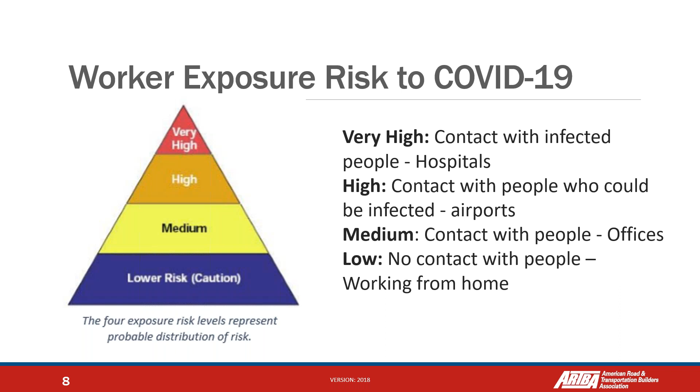ARTBA has created very good resources, especially for the roadway construction industry. We are constantly revamping this information. We have videos, you can go to the webpage. Just Google ARTBA COVID-19, and you'll get videos, toolbox talks, checklists, templates, and respiratory advice. Let me see if I can go there now.

Yes, I can. So you can visit our ARTBA webpage, and there's a members-only area with very good information about COVID-19, state by state, on how restrictions or government decisions are affecting each state. But this safety resources area is open for everybody: videos, toolbox talks, checklists, documents that you can use, especially for the roadway construction industry, both in English and Spanish.

Let's look at checklists for employers and employees, for example. You can get one of these fact sheets and so on. So you have very good information here that is available for everybody.

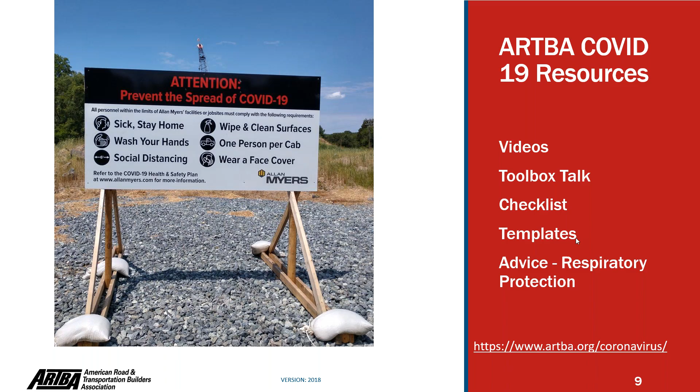You just need to visit the ARTBA webpage, or browse ARTBA COVID-19, and you'll arrive at this webpage. I want to share with you a video we created especially for the roadway construction industry, on how to keep our workers safe and prevent contamination with COVID-19.

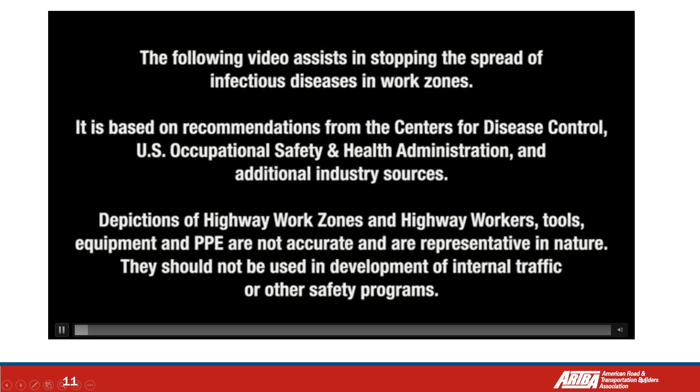While a highway work zone is not considered a high-risk area for infectious diseases, universal precautions can and should be made to prevent their spread between workers, supervisors, visitors, and the general public. The three primary ways we can protect one another from the spread of infectious diseases, such as the flu, SARS, MERS, and COVID-19, are job site screening, social distancing, and sanitation.

It is everyone's job to follow these steps to make certain that we're all protected. These simple processes will go a long way in keeping you, your crew, and your family safe during an outbreak of an infectious disease.

Let's talk about job site screening. Based on recommendations from the Centers for Disease Control, the best way to keep a disease from spreading is to keep an infected person from entering the work site. Since there's no way to work from home on a road construction site, workers who report to a job during a health pandemic or serious disease outbreak will need to enter the site.

Before doing so, a person appointed by the employer should consider asking each worker the following: In the last 14 days, have you or anyone you know been in direct contact with a person who has had a confirmed case of an infectious disease, including COVID-19? Have you or anyone in your family been in direct contact with a person who is currently being tested for a disease? Have you traveled internationally, been on a cruise, or in an airport in the last 14 days? Have you had symptoms of the disease in the last 72 hours without the use of medication?

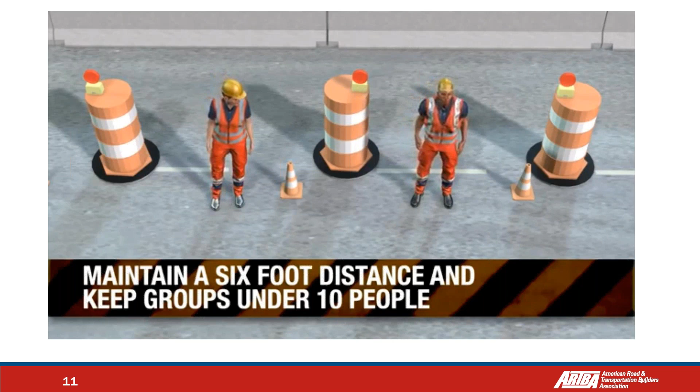Next is social distancing. Social distancing is a way to restrict when and where people can gather and how close together they should work. It is meant to stop or slow down the spread of an infectious disease. Working on a roadway project doesn't often put you right next to another person, but occasionally you'll need to speak and interact with others. Following basic protocols for social distancing, keeping 6 feet apart from others, and not gathering in groups larger than 10 will significantly mitigate potential exposure. Here are some tips for you and your employer to help you continue working by practicing social distancing.

Continue morning exercise, toolbox talks, and safety meetings, but in smaller groups with individuals 6 feet apart. Use a megaphone or other amplification source if needed. Keep in-person meetings short if there is no other option, such as a phone or radio call, and maintain appropriate distancing.

Take turns viewing documents or plans if there is not a digital version or hard copies for everyone. Eliminate community food options, such as lunch buffets, donuts, etc., and discourage workers from sharing food. Remove community microwaves, water dispensers, and coffee pots during the duration of the disease event. Provide water bottles and individual portion containers.

Expand break spaces as much as possible within the limits of the internal traffic control plan to provide more safe distances for workers. Stagger shifts and break times to schedule fewer workers on the site at the same time to reduce exposure. Restrict access to confined and enclosed spaces like trailers and any spaces that use recycled air.

Finally, sanitation. Thorough and consistent sanitation, including regular cleaning of all shared surfaces and a strong attention to personal and group hygiene, is your last and best line of defense against an outbreak or pandemic of an infectious disease.